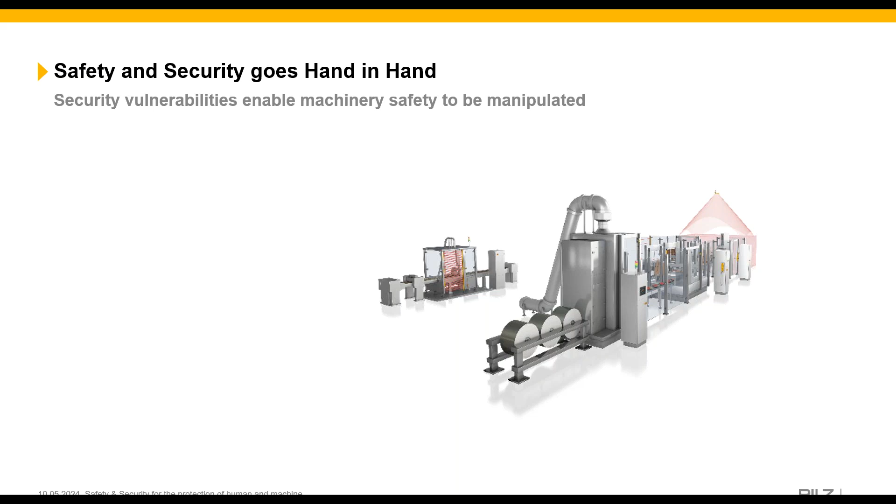So safety and security: security vulnerabilities enable machinery safety to be manipulated. We're all familiar with machinery safety, which protects your staff from hazards due to the machine itself. But security protects your machine and its data from manipulation from unauthorized access, so we're protecting against corruption.

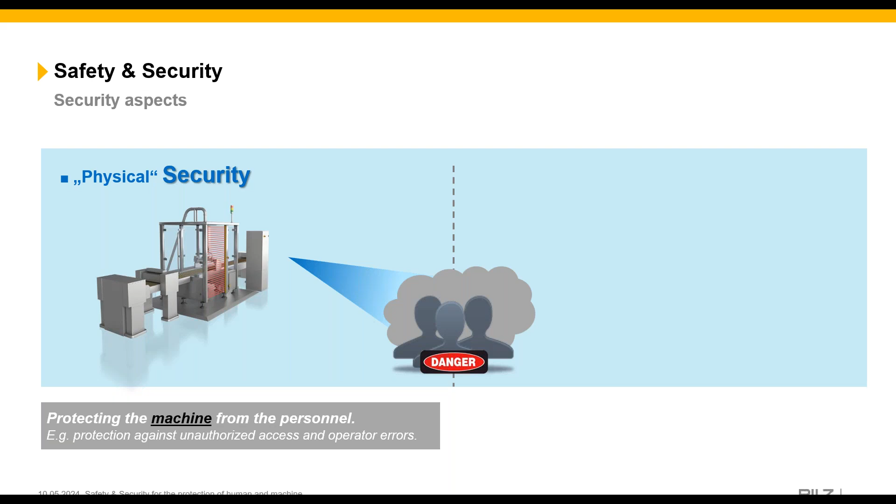With security aspects, we have physical security, which protects the machine from personnel, i.e. we're protected against unauthorized access, operator errors, etc., even to an HMI screen. And then we have information technology security, where we're protecting devices and data from attackers, and that could even be in-house, or it could be remote.

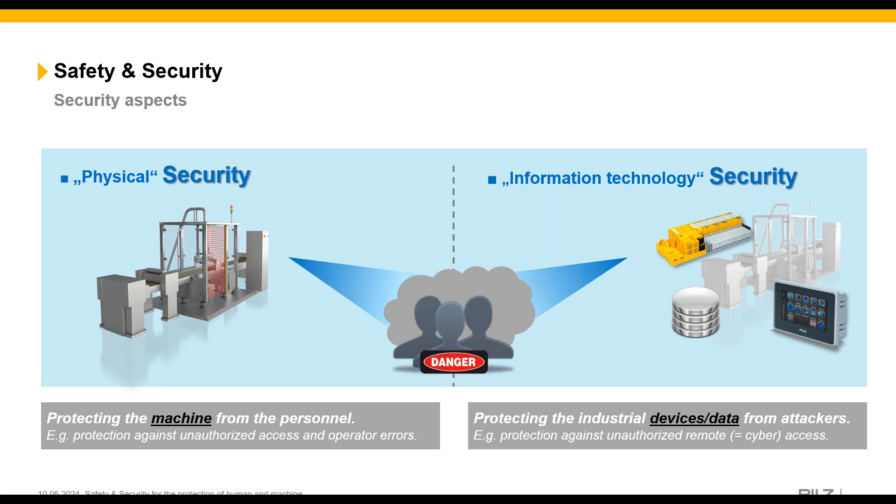So why is machinery safety in transformation? If we look at industry, from the early days of industry, from steam power, weaving looms, now we have the terminology of Industry 4.0, Internet of Things. So there's now an ever increasing need and desire to interconnect everything together, so we can see what's happening in real time throughout the world. And as a part of that, security has become an integral part of our everyday lives.

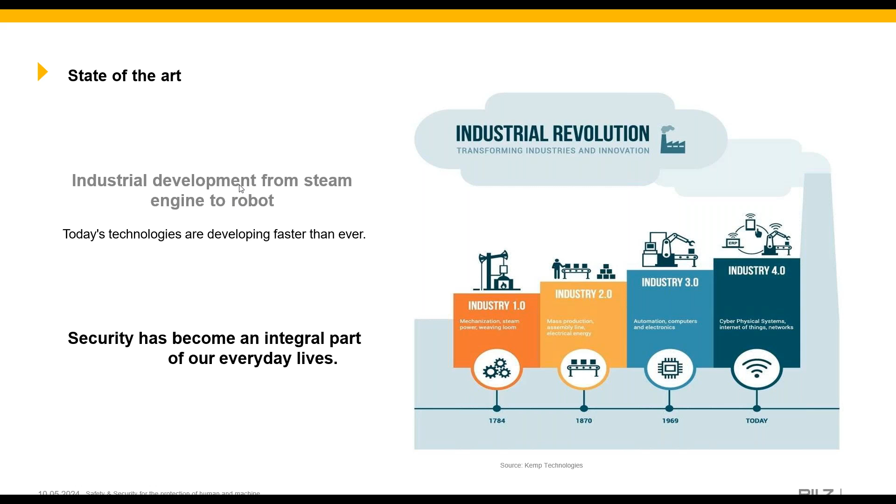If we look at how things stand currently, safety really is covered, or was covered, by the Machinery Directive, the Supply of Machinery Safety Regulations, and security has kind of been left to one side. It's not really been looked at. But because of this increase in digitalization and networking within the operational side of manufacturing, we need to now take this into account. So there will be changes upcoming, the machinery regulation being one of them, where it will now look at both safety and security.

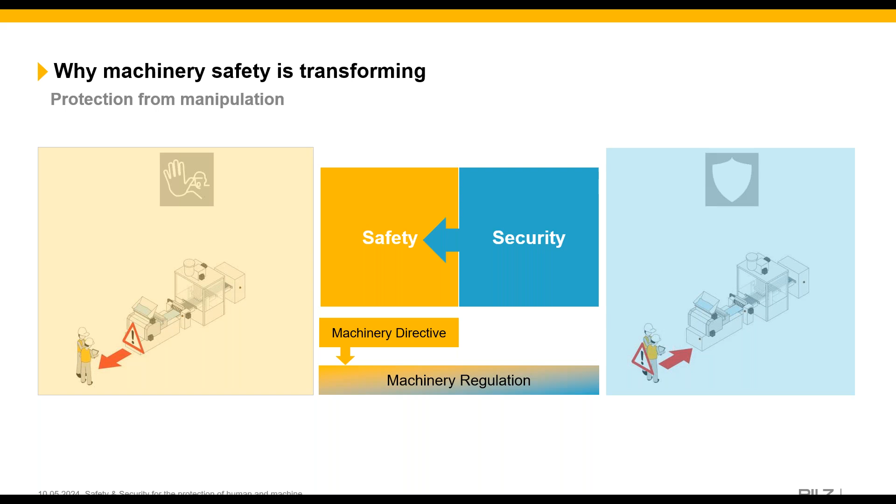So it's a changing process, really. We have the machinery regulation, and this has been published. We have the Network Information Systems, NIS2, which is also published and due to be implemented. And then we have the Cyber Resilience Act, again, has been published and is due to come into force.

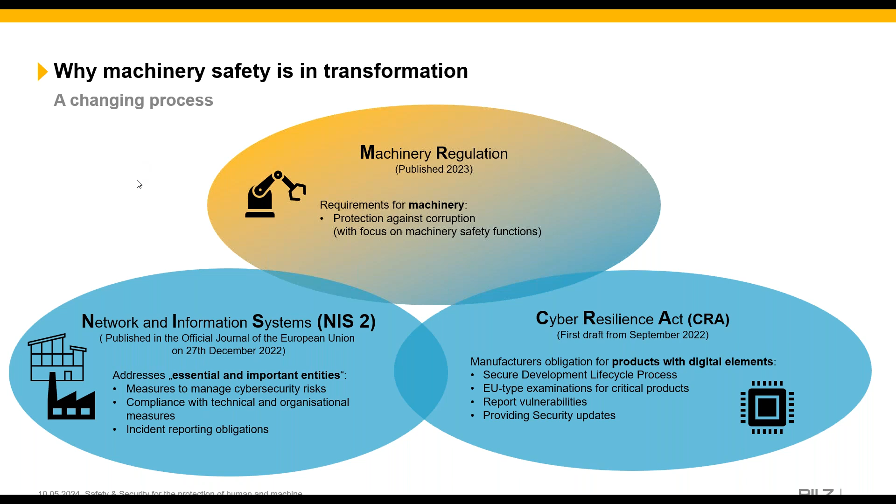So the NIS2 directive - we're unsure at this stage whether or not the UK government is going to take this and incorporate it into UK law with regards to Brexit. But we do have NIS, and this pretty much covers large utility companies. The NIS2 directive is looking at that, but also manufacturers of machinery and equipment.

We have the machinery regulations. This was published last year, and this will now look at protection against corruption, so cybersecurity, and cybersecurity will also most likely form a part of ISO 12100 for risk assessments. And then we have the Cyber Resilience Act, which is expected later this year, where if there's products with digital elements, they should be delivered without any known vulnerabilities.

So as it stands, if you're a manufacturer of electronic equipment with digital elements, you could actually sell those even if you know that there are vulnerabilities with regards to cybersecurity. From October 2024, if you know that there are vulnerabilities within those products, then you shouldn't be placing those on the market.

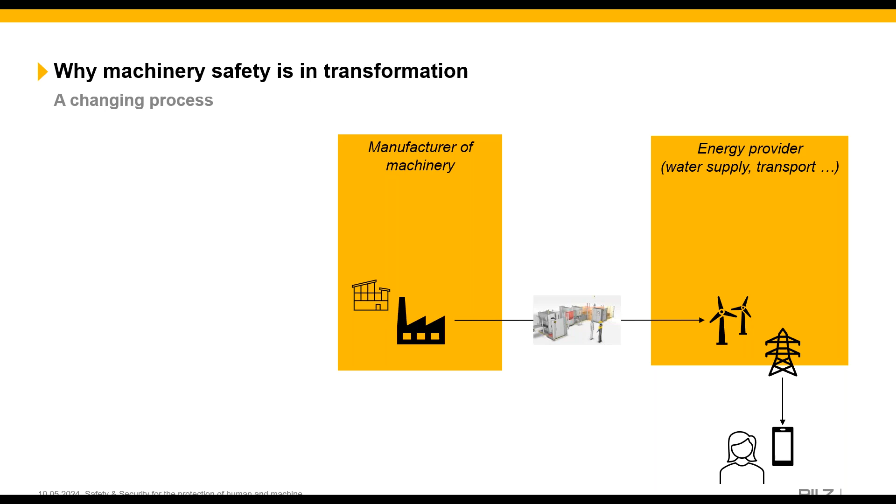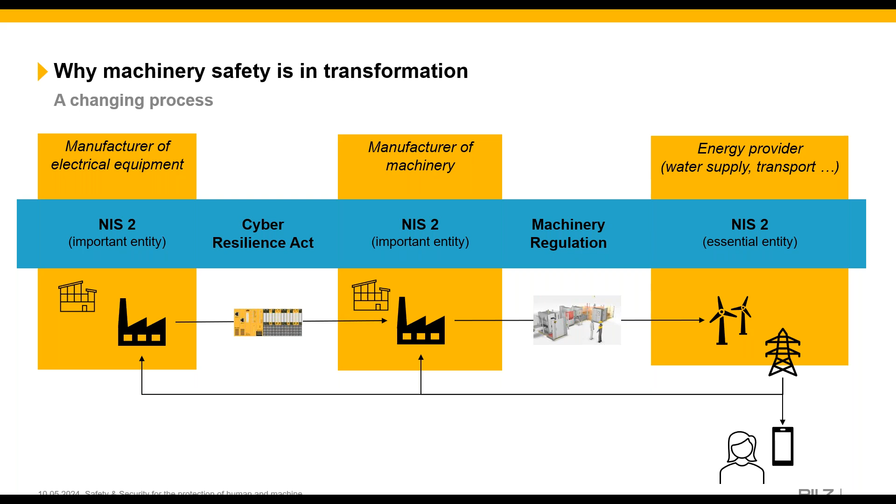So it's an ever-changing process, really. With the ever-increasing need for connectivity, we have our energy providers or utilities, our manufacturers of machinery, and our manufacturers of electrical equipment. NIS2 will become essential for utilities and large companies, and an important entity for manufacturers of machinery and electrical equipment. The machinery regulation will come into effect in 2027 for manufacturers of machinery, and the Cyber Resilience Act will come into force for manufacturers of electrical equipment. So you can see how they're all interlinked together.

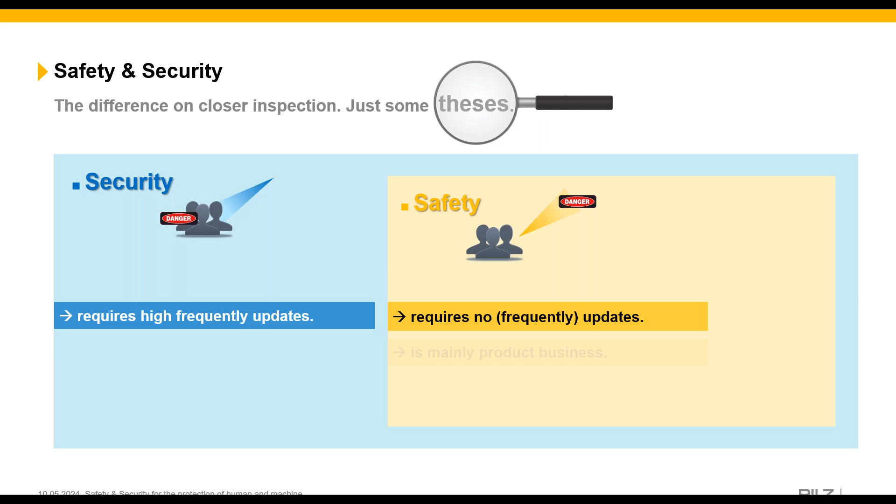Safety is mainly a product business, whereas for security it's solutions. Primary concerns generally are manufacturers with safety, and for security, machine end users.

So if we look at achieving our security objectives, what we class as CIA is our number one priority. That's confidentiality - data may only be read or modified by authorized users, and this applies for access to stored data as well as during data transmission. We then have integrity - this data may not unknowingly be modified, and all changes must be traceable. And then finally we have availability, and this is the prevention of system failures, so access to data must be guaranteed within an agreed timescale.

Our confidentiality, integrity, and availability priorities are really different between our IT and OT networks. For IT, confidentiality typically takes number one priority, followed by integrity and then availability. What we mean by that is our data, we want to keep that stored and secured - we don't want any GDPR breaches, for instance. With regards to availability, if a laptop was to fail or a printer fails in an office, generally there is a spare one or a way of working around it. So that's why priority is less.

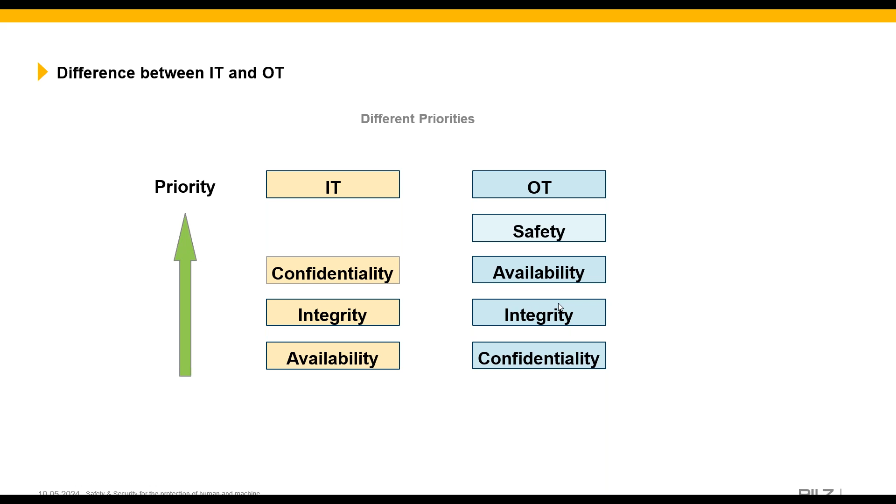So what happens is if there is a threat to our safety-related part of the control system - the relationship between threats, vulnerabilities, and consequences all have a direct risk, a security risk, on our safety system. These threats basically will expose any vulnerabilities that we have, and those vulnerabilities will then have a consequence on the performance of our safety functions. So what we need to do is introduce countermeasures to combat against those, and we'll run through that in more detail.

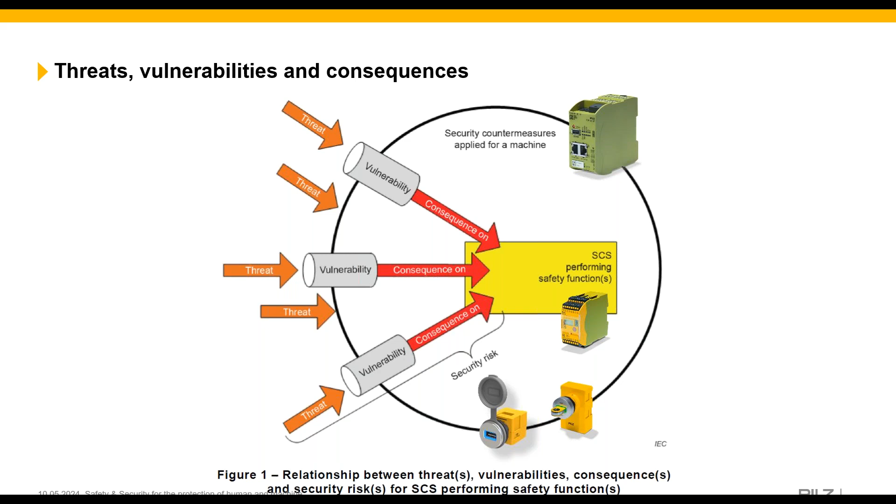If we look at security with regards to the machine control system, a threat can succeed, or if it's exploited, that will then create a vulnerability, and the consequence of that could be on an asset - that could either be components or human - and that could lead to a security risk to the safety control system. And it doesn't have to stop there; other consequences could be environmental impact, loss of property, business interruptions, etc. That security risk could have an impact or trigger the failure or malfunction of the safety functions no longer performing as intended, and that can then lead to degradation of risk reduction measures.

So, for instance, you might get unintended movement, or there might be an increased reaction time to a light curtain, for instance, and that would result in harm potentially.

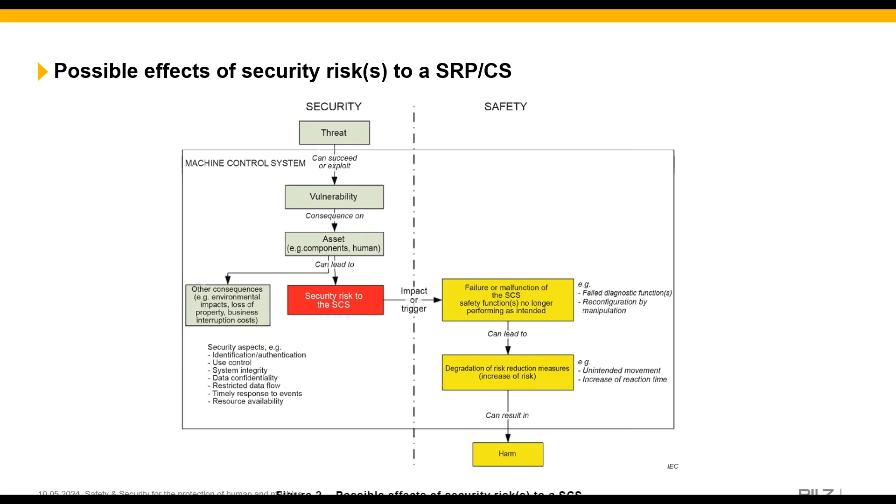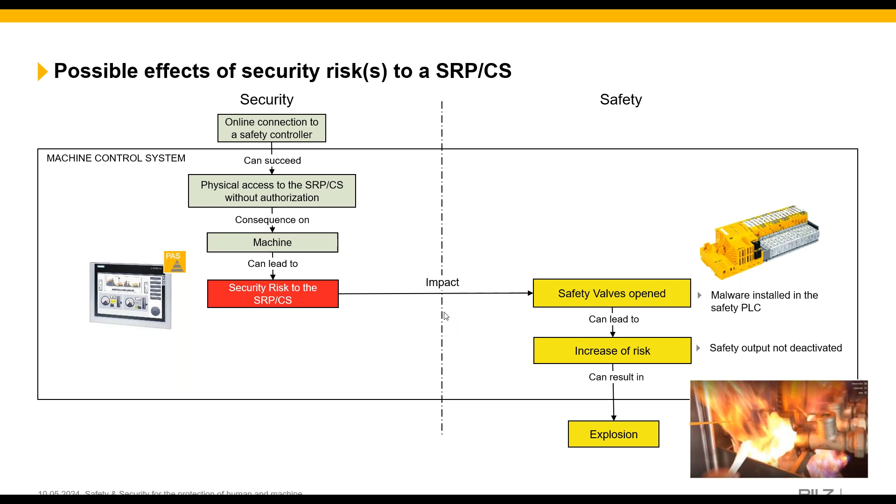So, therefore, an online connection to a safety controller, or physical access to the safety parts of the control system without any authorization, that's got a consequence on the machine. That leads to a security risk, and the impact of that is safety valves being opened due to malware installed on the PLC. That can lead to an increase of risk, so there's no safety output because that's not deactivated, and that could lead to an explosion. So it's just an example there.

So countermeasures to machinery and related cybersecurity and machinery related standards.

ISO 27000, this is information security management systems. This is really for organizational implementation. It looks at information security management systems, giving information on security, cybersecurity, privacy protection, so information on cybersecurity controls, how you can do implementation, so there's guidance on monitoring measures, analysis and evaluation, and it also gives information and code of practice for information security controls based on some cloud services.

We then have IEC 62443, which is security for industrial automation and control systems, and this runs through application and products, split into various parts. So there's general requirements, then policies and procedures for the organization. We have system requirements, and then broken down into components, which I'll go through in more detail.

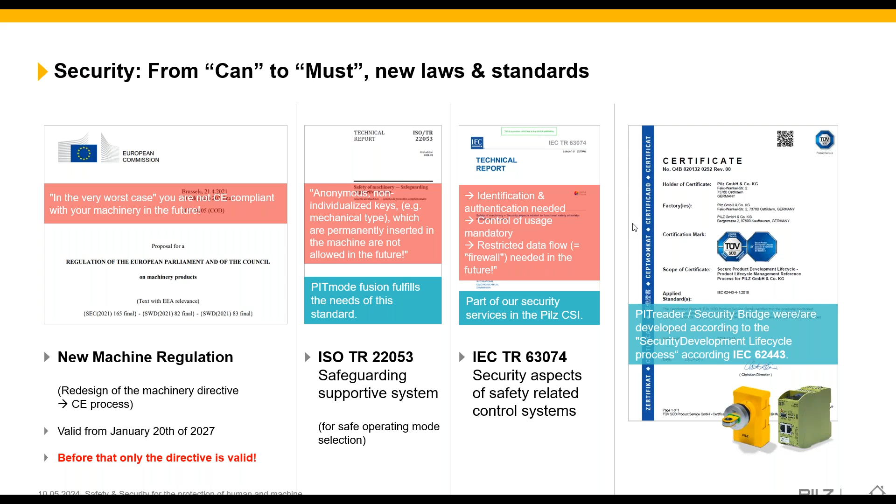So the machinery directive is becoming a regulation, and it's going to talk about protection against cyber threats, and this becomes an essential requirement. It will form part of the EHSRs, the essential health and safety requirements, and security for machinery safety becomes mandatory. So as mentioned, in the worst case, you'd no longer be CE compliant with your machine in the future.

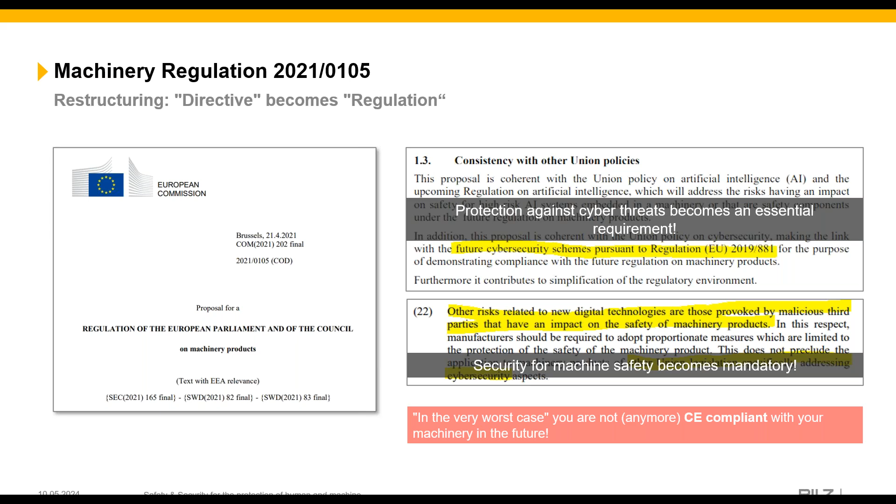So what does that mean? We have emerging digital technologies with regards to security. There's no direct reference to the NIS directive, but it still discusses aspects of cybersecurity within the regulation, and we look at protection against corruption. This would actually form a new EHSR 1.1.9, and this defines requirements for interference, really, so protection against corruption.

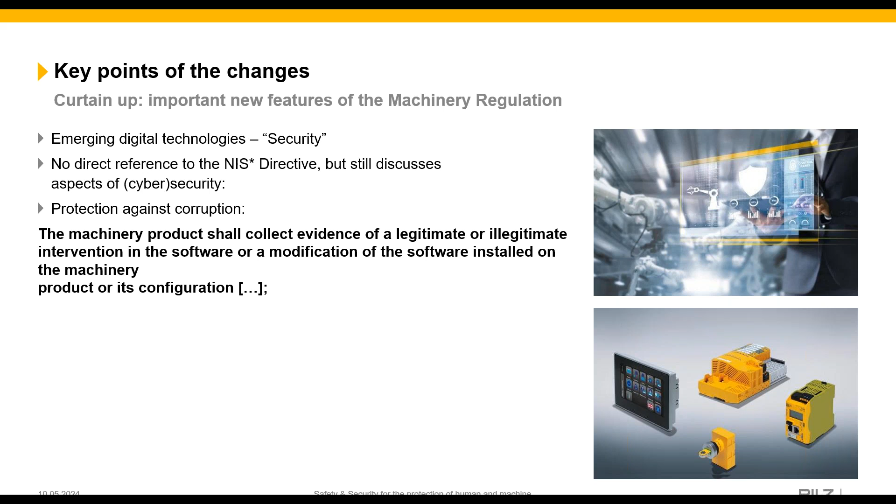The linking of devices, such as USBs, and remote devices, such as the internet, must not lead to dangerous situations. So the machinery product shall collect evidence of legitimate or illegitimate intervention in the software or a modification of the software installed on the machinery product or its configuration. So what we mean by that is it's not just somebody doing a malicious attack, it could actually be somebody making a mistake, an employee or a disgruntled employee in this case.

And then we've got the safety and reliability of our control system, and this is EHSR 1.2.1, and this will be a rewrite. The paragraph here is that it must be able to withstand malicious attempts from third parties, shall not lead to hazardous situations, shall be protected against accidental or intentional corruption.

So again, what we mean by that is this isn't necessarily just either a state sponsored attack or somebody in their bedroom trying to gain access intentionally to a control system. It could be a maintenance engineer, or it could be an employee that has just made a mistake. So it's both malicious and non-malicious.

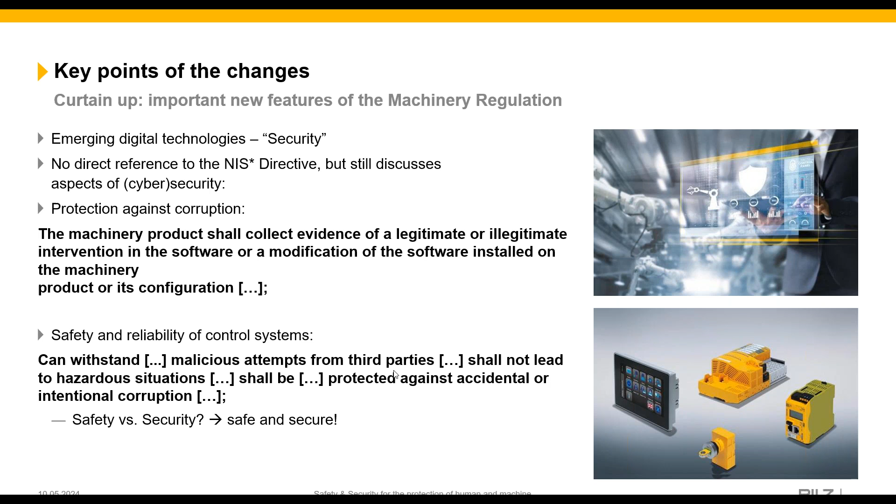So safety and security really is becoming safe and secure. If we look at safeguarding support systems, this is where typically you would have a mechanical key in a panel, and that key would be in machine run mode, and then you may have to run it to a jog mode, for instance. When we look at technical report 22053, we need to look at safeguarding support systems, and what these allow is identification of authorized personnel. There's verification that authorization for that selected task matches the identification of the person or personnel. It informs the user of that authorized task. It enables the mode of what's called safe mode operation to correspond to the selected task, so you can change from a run mode to a jog mode, for instance, and specifying the zones to which authorized personnel have access.

We'll run through this in more detail. Effectively, you've got your safeguarding support system. In this particular case, we've got our pit reader and our key. If our person comes along with their key, and they're trained, competent and authorized, they'd place their key in the reader, and that would allow them to change the mode of the machine, for instance, or gain access to the HMI. That would determine the permissions they have and authorize that, and that would send a signal to the safety related parts of the control system or HMI to allow them to make those changes.

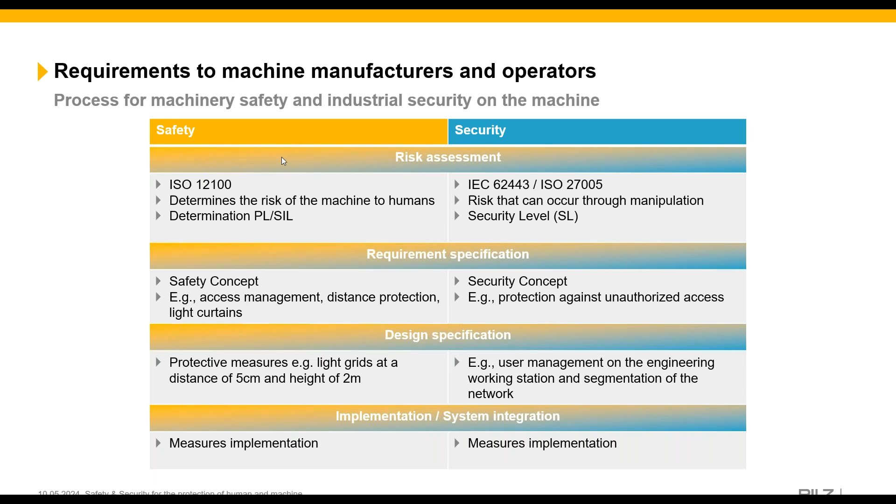And then finally, we'd have our implementation and our system integration, so it's pretty much the same for both - those measures would be implemented. We'd then have our verification and validation, so we'd do verification of the correct implementation of the risk reducing protection measures for our machinery, looking at SISTEMA, PAScal reports.

We'd then do our functional safety validation once it was installed. But for security verification, we do our verification of security measures, but validation is not required. With regards to the cycle, there might be annual safety briefings for the machine with regards to safety. But as mentioned earlier, with security, it's going to be far more frequent.

So we'd have to look at what vulnerabilities become known within the industry. We can look at websites such as CERT@VDE or ICS-CERT, and these are IT security platforms that share problems and issues specifically in the field of industrial automation.

We then have to risk assess those vulnerabilities. Device manufacturers would describe what vulnerabilities they may be or what they found. Machine manufacturers would evaluate these in the context of the machine and the risk assessment, and information would be provided to the machine operators. We then have our patch management.

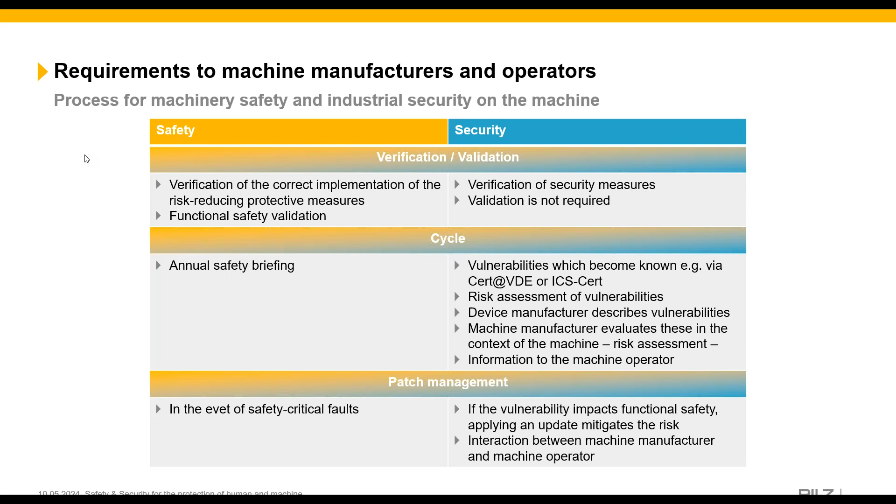For machinery safety, it's really in the event of safety critical faults that we would look to upgrade. Whereas with security, if the vulnerability impacts functional safety, we'd have to apply an update to mitigate that risk, and that's where we use those security platforms, those websites, to look at that. We then have the interaction between the machine manufacturer and the machine operator.

So you may be familiar with this graphic that we have, which we typically use at Pilz for machinery lifecycle. So we have our risk assessment, our safety concept, safety design, safety implementation, safety validation, and we then have our machinery compliance, for instance, with CE marking, etc.

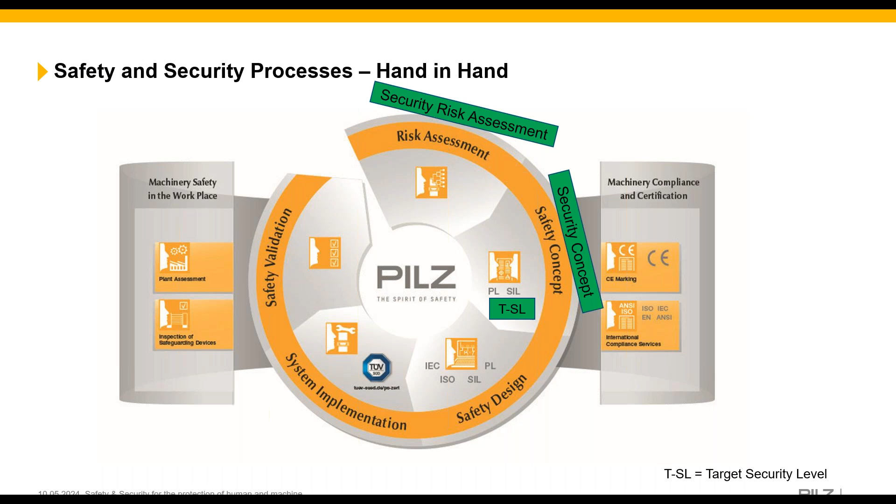If we look at this for security, so we'd carry out our security risk assessment, we'd introduce our security concepts, and this is where we'd have a target security level that we'd want to achieve. We would look at safety design. We'd then use 62443 and 63074. We'd use those standards to assist with that. We'd then do our security design.

We would do our security verification. We'd carry out some kind of tests. But then this is an ongoing process. So with machinery safety, it typically stops here. But with cybersecurity, it will be an ongoing process throughout the life of the machine.

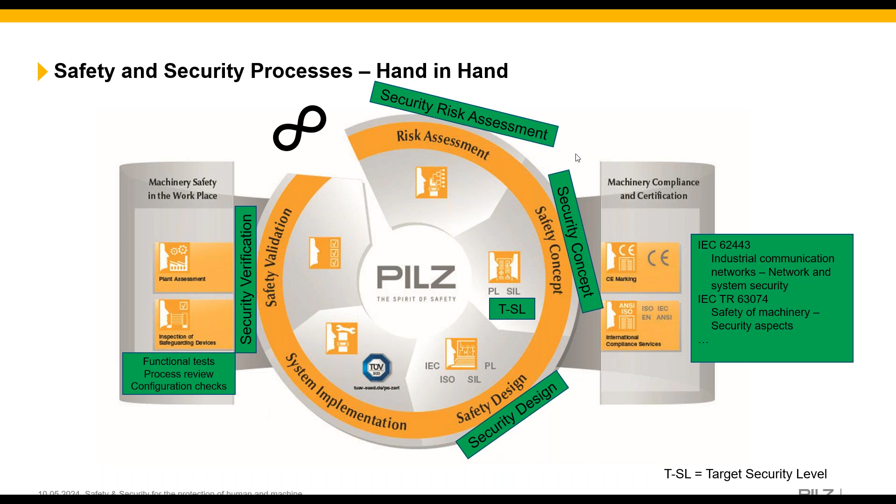So risk assessments with regards to zones and conduits. So we have our organizational security measures. So these would be kind of taken from 27000. So if we use the analogy of like an airport, so you have security checkpoint rules.

So, when you've booked your flight, you're going to get information sent through from the airport or the airline to say what you can and can't take onto the plane, for instance, or take into the airport. So these are operational measures. You probably get and you hear public announcements, don't leave your luggage unattended, for instance. And again, that is all part of their policy, really, and procedures for awareness to passengers.

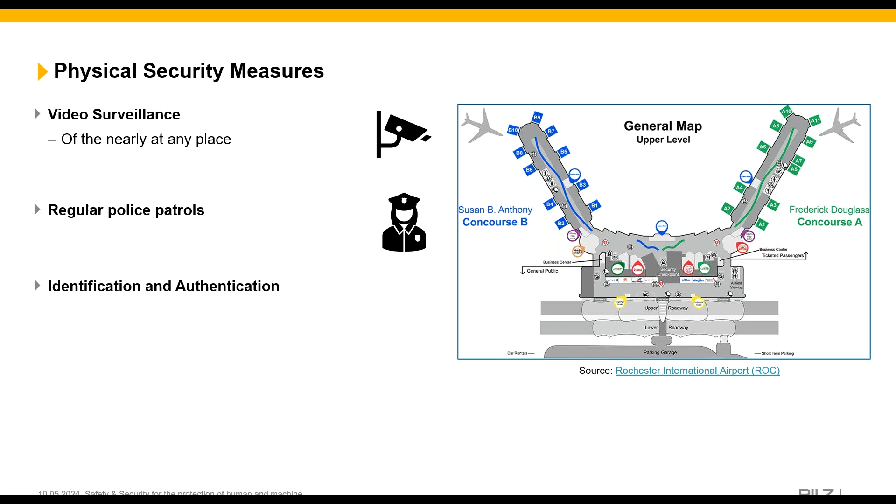There'll then be physical security measures. So there could be video surveillance, regular police patrols, but then there is identification and authentication. And what we mean by that is, anybody can go to the departure lounge, but only if you've got a ticket can you actually go through.

So, to get that, you would go to the ticket counter. Are you the correct person for that flight? You would typically show your passport, for instance. They would identify you and authenticate that you are that person before they issue it. Border control, who am I? Am I allowed to leave or enter?

So that's kind of a zone because you're going from one area to another. Boarding the gate, am I allowed to board the plane? Again, you'd have your passport and your ticket checked. So at each point, you're being identified and authenticated against. And if you are that person, then you'd be allowed to go through if you're allowed to. So again, for airport staff with their key cards, are they allowed to access restricted areas?

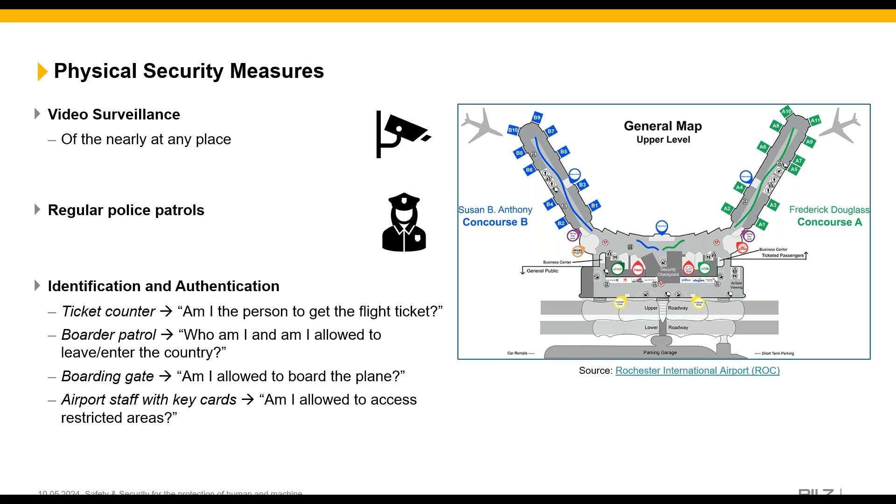And so if we look at this with regards to the airport, the green zone is our departure lounge. So that's for all members of the public, really. And the red area is your ticketed passenger zone. So that's once you've gone through security. So in addition, each gate within the walkway to the airplane is a zone, and we've kind of highlighted that in blue and in green.

So in order to move between these zones, the green and the red area, there's specific rules and they're defined. And so to move from the general public zone to the ticketed area, so the passenger zone, you need to pass the security checkpoint, which is this yellow circle. And you can only do that with a valid ticket, as well as passing the screening of bags, etc. So that's kind of like our VPN and our firewall. There's our rules, etc. that are there. And if you don't meet those rules, then you can't go through.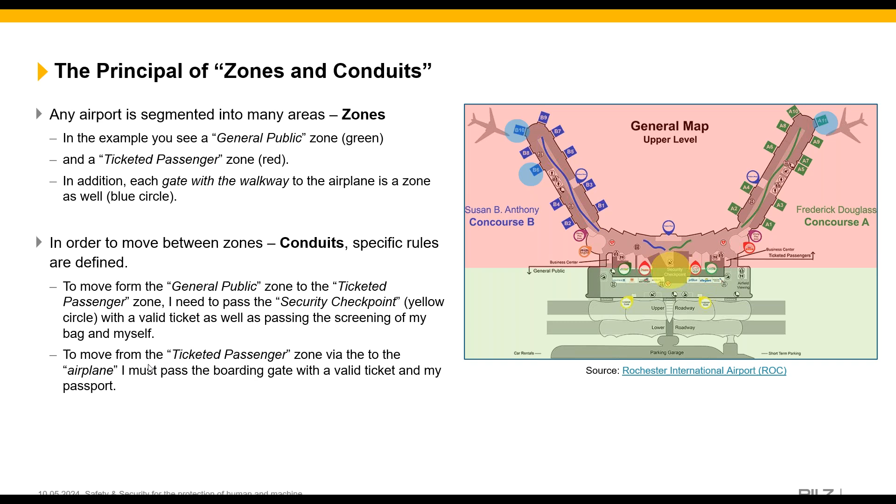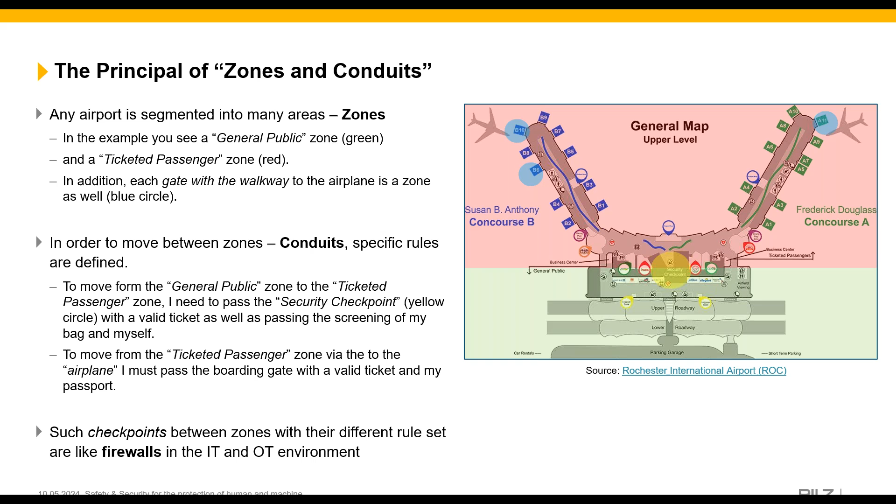And there you can only do that if you've got the correct ticket, passport, identification, authentication, etc. So as I said, these checkpoints really are kind of like the different rules set between firewalls in the OT and the IT networks.

And so then if we look at our system under consideration, so using 62443, we have our IT and we've got our OT networks, so we can zone those off effectively. So this is our IT network, this is our OT network. And then what we're going to do within that is we're going to focus on the OT network, and we're going to start to zone everything together.

So we would look at all of our safety systems, we'd look at all our process, we'd look at our Wi-Fi hotspots, we might look at all our standard PCs, SQL servers, etc., etc. So we'd look at everything that's within that OT network, and we would look to group them, to zone them together.

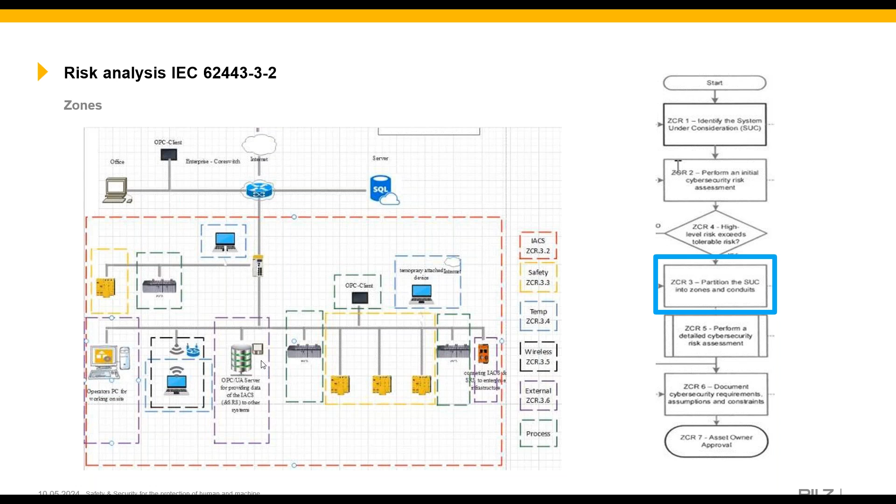Then from that, we would then look at really the conduits between them. What's the communication between them? What's the influence of one to the other? So, we'd look at maybe maintenance, for instance. What do maintenance need to do? And what devices or zones do they need to have interaction with? And so we'd look at kind of the automation, safety, wireless devices, and all of these really have a flow between them, and we need to then create the rules, etc., between those, depending on the risk assessment and what is the risk to the OT network if it was compromised.

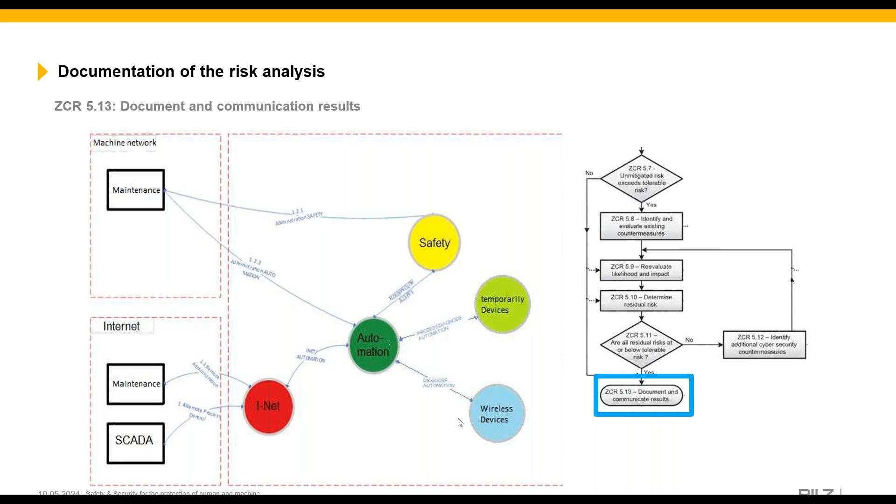And to do that, we would look at foundational requirements and countermeasures. So this part really is like our risk assessment to a machine. If we looked at a machine, we need to put a guard on there, we need to put an interlock on there, for instance. The interlock, the guard, the light curtain, they're really countermeasures that are being used to protect the machine.

This is similar, but for security, cybersecurity. So our foundational requirements are broken down into 7: identification and authentication of control, use control, system integrity, data confidentiality, restricted data flow, timely response to events, and resource availability. Based on our zones and our conduits, we will use either 1, 2, 3, or all of these to combat against those risks, and that would all depend really on what our risk assessment came back with.

So this is just a breakdown really of those foundational requirements. And really the industrial control system, what we mean with user management is access to authorization systems, certification, authentication with VPNs, etc., malware protection, application input validation. It's just broken down a bit more.

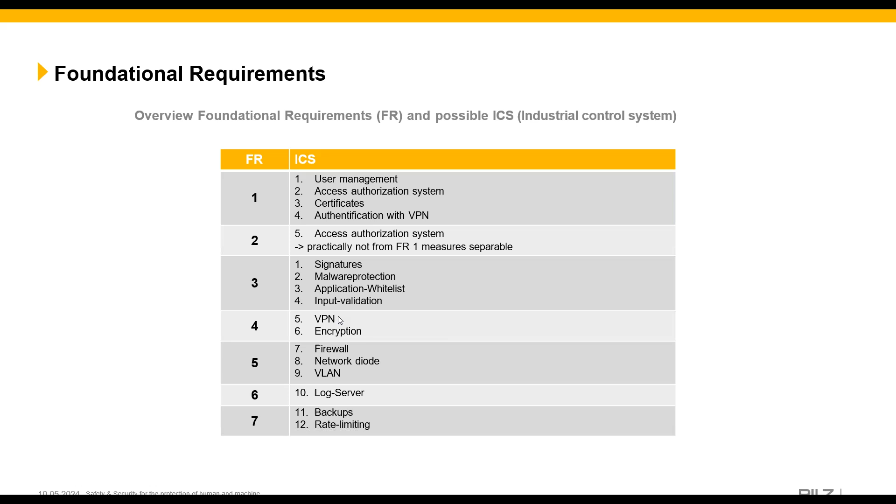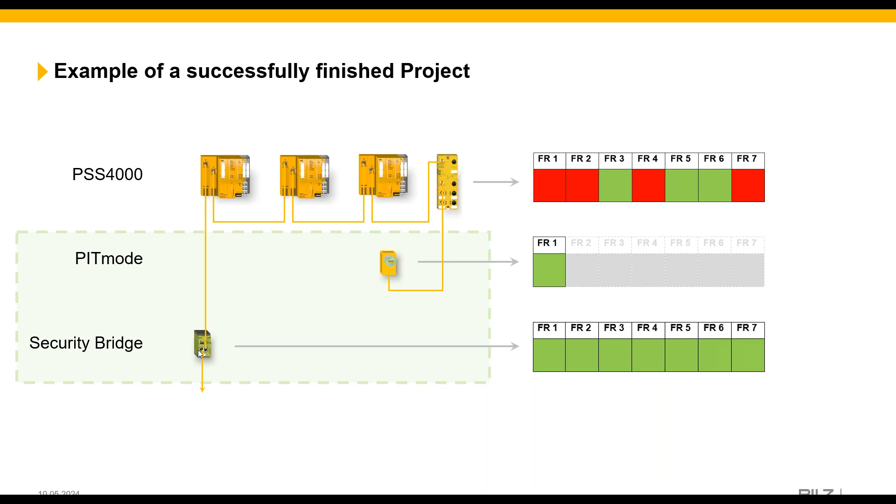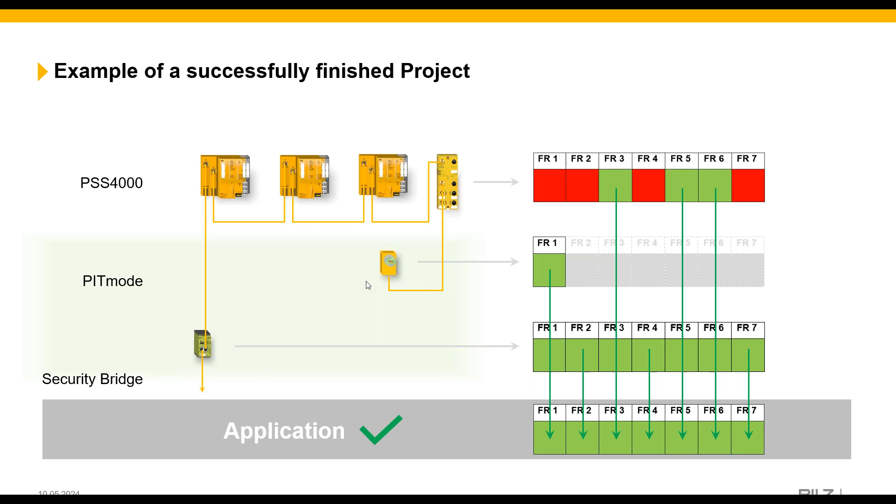So if we look at an example, really, we've got a PSS 4000. As it stands, the foundational requirements there of what it can achieve on its own, but by implementing what we call our PITmode and our security bridge, which acts as a VPN and a firewall, we can actually achieve all of the foundational requirements if they're required based on our risk assessment, and therefore we would meet the requirements of the application for the security level.

So our countermeasures. I'm really going to run through some products now that can help with this. So with identification and access management - what is identification and access management systems?

Well, really we want to protect the business. So we want employee protection, liability, productivity, and data. We want to make sure our employees are safe. We want to make sure that people just can't turn a machine on and off, even though if it was safe to do so, but we don't want them to do that if it's not right from a productivity point of view. So you want to ensure that only trained, authorized, and competent people can do that. We want to maintain our data and any liability, and we'll have a number of persons within the organization that are responsible for those things.

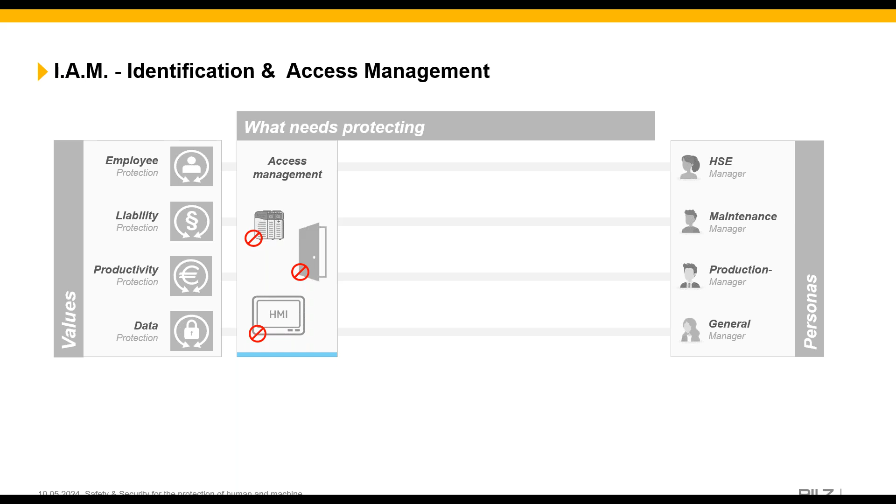And then we need to look at what needs protecting. So we've got access management - this could be to control systems themselves, HMIs, to areas of the machine. Safe operating mode selection, so we want to ensure that only the correct personnel can change a machine from running to a jog mode, for instance, or service mode. We want to have maintenance safeguarding, so we want to protect from unauthorized startup, for instance. So we can look at 14118.

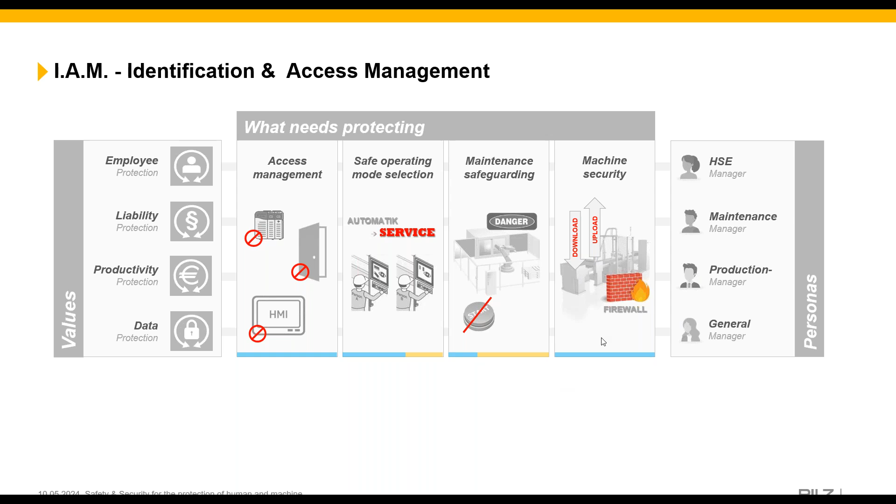And then we want to ensure machine security as well with our VPNs and firewalls. So we have a number of products now that I can run through that will protect against those and act as countermeasures.

So parts of identification access management - we have a number of ways of doing this. We typically have our key, we have a card, or you can have stickers, or potentially we can use your own card readers, depending on the frequency of those. So that is used to identify as an identification, and on there, really, it would store all the permissions that personnel has - so what's their training, etc.

We can set a timestamp on there so that, if they need to be retrained every 12 months, then we can set a date so that has to happen. It's not going to be kept on a spreadsheet somewhere. So if they come after 12 months and a day, it would prevent access. And then we have the access side, which is really the forwarding of the information, so the authentication of that identification. We do that through different readers and PITgateboxes.

So the identification will be, who am I really? The person, who are they? What hardware can they have basically permissions to, processes, etc., and that could be different for each machine. So depending on your requirements, if I'm familiar with one machine, I might have all admin rights. If I'm not with another one, then you can restrict what I can do to that. So again, it's all based on your qualifications - are they an operator, service, inspector, line manager, for instance? What level's their education? Are they a beginner, expert? Are they a supervisor?

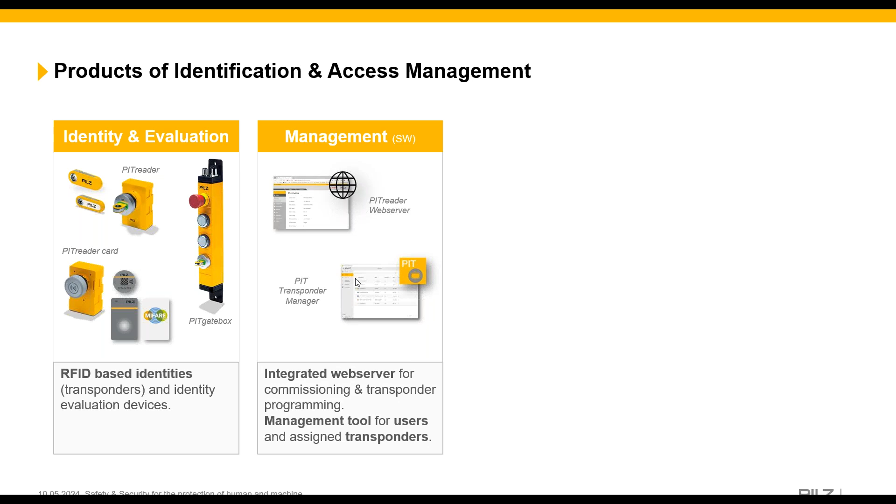So it's all based on what we call RFID, near field communication. That's the way the technology operates. We have an integrated web server, and that's what you can use to program the keys and the permissions.

The PITreader devices can also be networked. So depending on your application, it can either be standalone at the machine, or you can network them together, and you could do it via the supervisor's desk.

And then we can also look at operational elements as well. So we can actually control things like the USB switch or an Ethernet switch. So if you had a contractor come to your site, they can't just connect their laptop to your machine, because that Ethernet port would be down, or the USB port would be down, unless you were trained, competent, and authorized. Then you could enable that Ethernet connection or the USB port. So you can restrict that access.

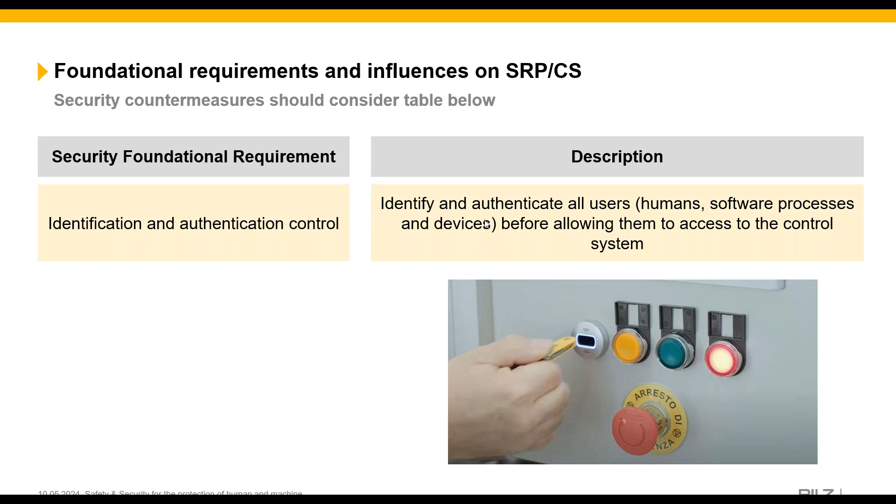So if we look at security countermeasures, with regards to identification and authentication control, we need to identify and authenticate all users before allowing them access to the control system. So what we mean by that is we'd insert our key into the reader. That may allow us access to the HMI. So it would be tailored to the individual.

So it's password replacement. We know passwords don't work because they're generally written down, or it's the first thing people ask for. They're written on post-it notes, etc. And it would allow you different control to be able to edit, read permissions on that HMI. What pages can you display?

Switching user languages. So we have heard of instances where new equipment has arrived. Somebody who's trained has changed something on the HMI. There's been an issue a couple of days later. Somebody saw what was done. They go into the HMI and cause a problem, and then it takes a few hours to reset the machine. This would prevent that because only trained and authorized personnel would be able to gain access to that HMI screen.

That's also the same for the controller or the PLC. So you can control who can activate functions, toggle between different kind of variants, programs, setting recipes, and then activating the USB Ethernet ports.

Then you've got door permissions. So this is really access permissions and management for industrial doors and gates. So only authorized personnel have access. You may be familiar with trapped key systems, for instance, where a trapped key system will work safely and in a predetermined sequence, but anybody can use that system. With this, the key is with the person, it's not on the machine. So only if you are trained, competent, and authorized could you actually gain access to that machine.

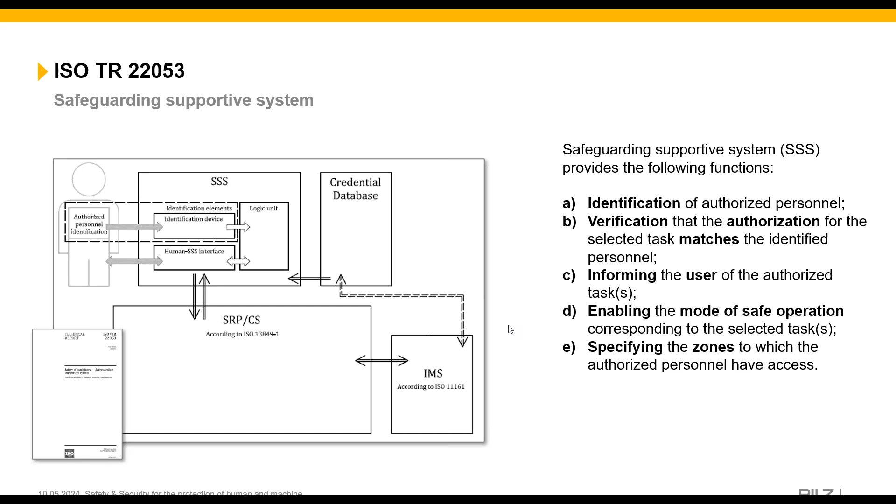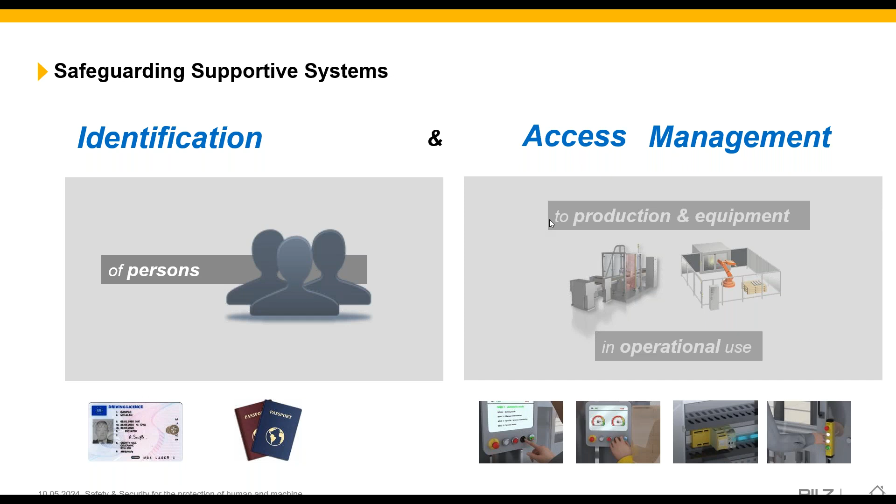So we ran through safeguarding supportive systems, but if I run through that now in a bit more detail, we have identification of the personnel. So that's our kind of driving license or a passport. So there's our identification. In this case, it's our key, and then that allows the access management, and that's where we've got our different access to either the HMI or safety controllers access, for instance.

So if we look at a typical installation, here's our control panel, HMI, got a USB reader, Ethernet ports at the bottom here. There's no identification. The key's always inserted in the panel and can just be turned by anybody, so you've got no idea who's doing what and when. The USB is also directly connected along with the Ethernet port, so anybody could connect to it, charge their phone to it. We've heard stories where people charge their phones, blowing ports. So that's how it stands.

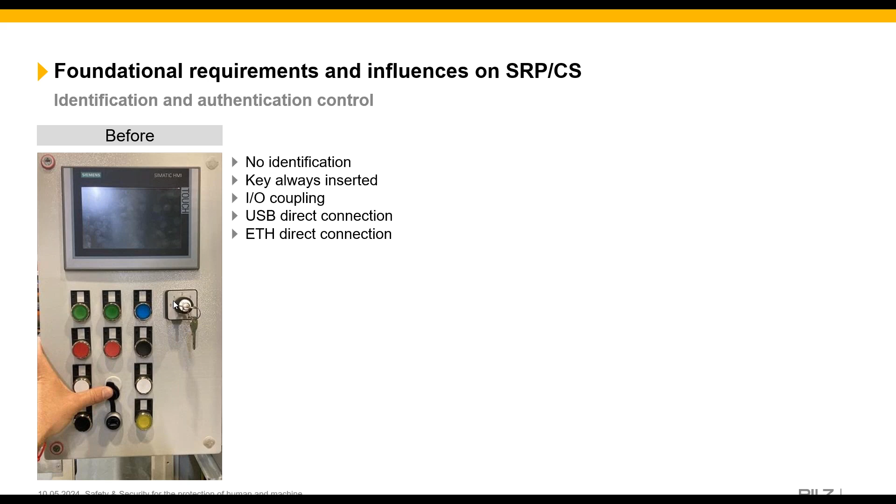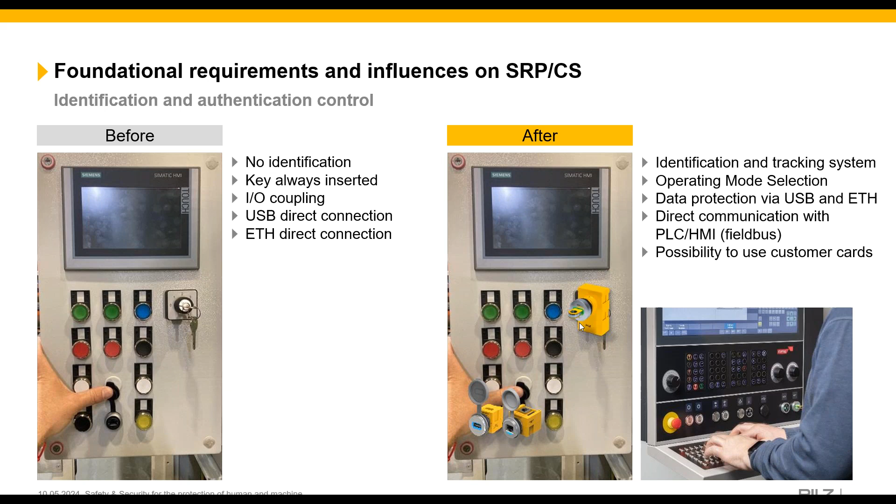Using encoded transponder keys with RFID technology, each employee can be granted machine approvals and permissions adapted to their abilities. This is where we can look at functionally safe operating modes, regulation of access and authorization, avoiding incorrect operation so the machine isn't down when it shouldn't be, and avoiding manipulation as well. This would effectively tick your

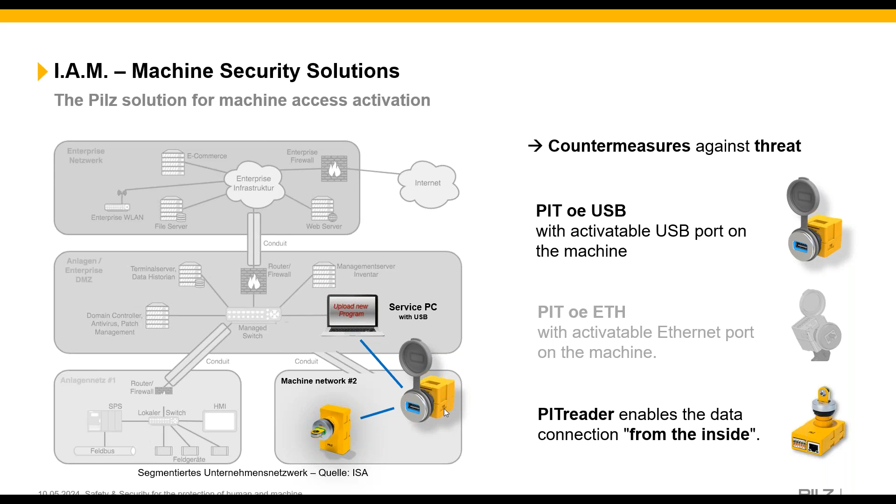So we've got our security measure here against the threat, which is a USB reader. Just to show you, if you needed to connect to that reader for service, for instance, you'd come along with your key. If you're trained, authorized, and competent, that would allow that PIT reader to be enabled, and you would allow connection basically. An example again here is malicious access to USB ports, so we're replacing that with our USB and Ethernet systems and our key to enable the enabling.

We've then got usage control, and this enforces the assigned privileges for authenticated users to perform the requested actions on the control system and monitor these privileges.

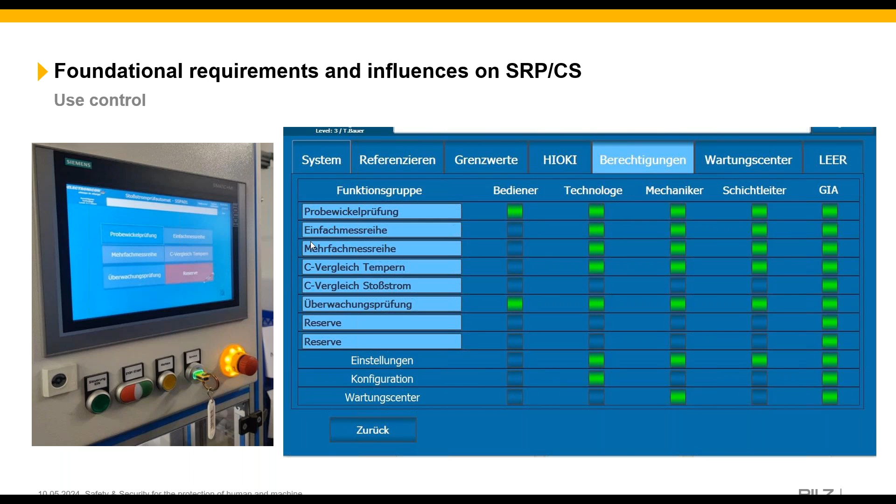So if I was an apprentice, for instance, and I see one of my colleagues doing something on the machine on a breakdown, if they're not there the next day and the same thing happens, I can't do what they've done because I haven't got the permissions. So really you're preventing potential downtimes to the machine and threats to the safety related parts of the control system through the HMI.

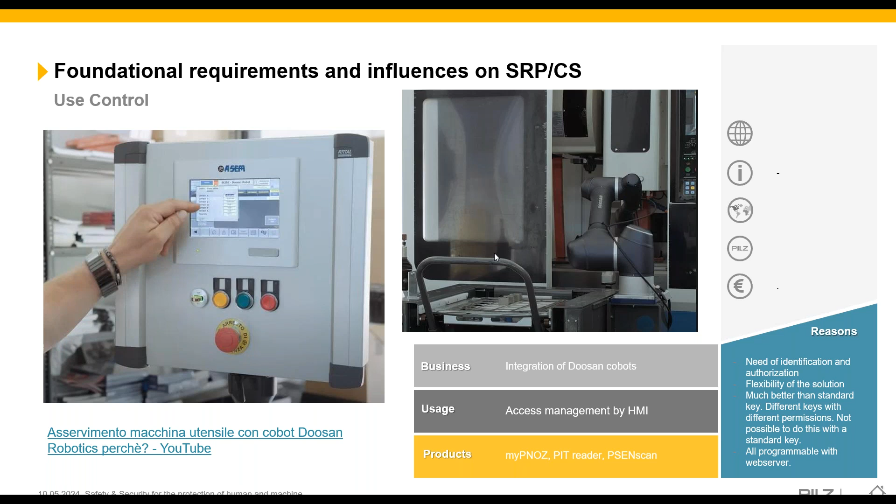So again, the application here is, here's our HMI. We have to put our key in. If we've got the correct permissions on the key, then it would allow for the HMI to be accessed.

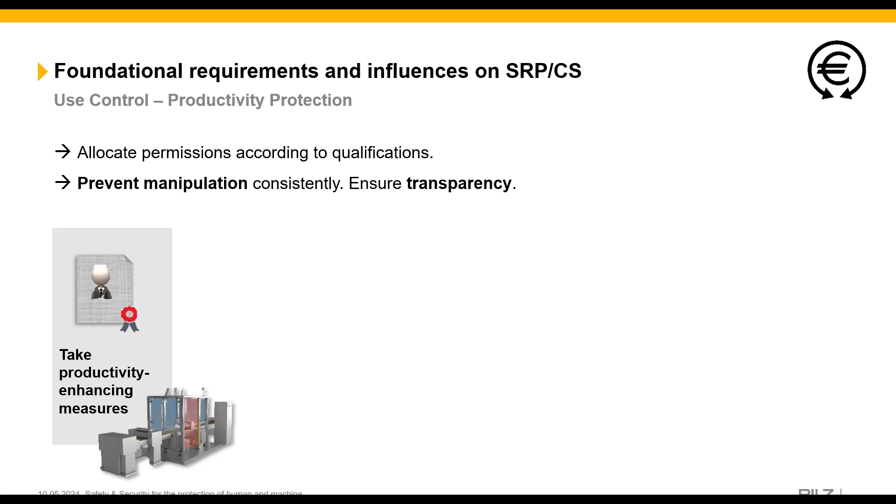So then we need to look at foundational requirements and influences on these safety related parts of the control system. From that, we need to look at preventing manipulation, really, so we have the permissions. That's an increase in quality due to clear responsibilities. You have effective know-how and protection of access to sensitive data, and you've got clear user levels, especially on complex machines.

Then the transparency really is the individualization of users, meaning that they are identified. Passwords are not secure, not personalized, and often known. Actions can be clearly assigned to users, and there's full detection capabilities in the event of a breakdown or an accident.

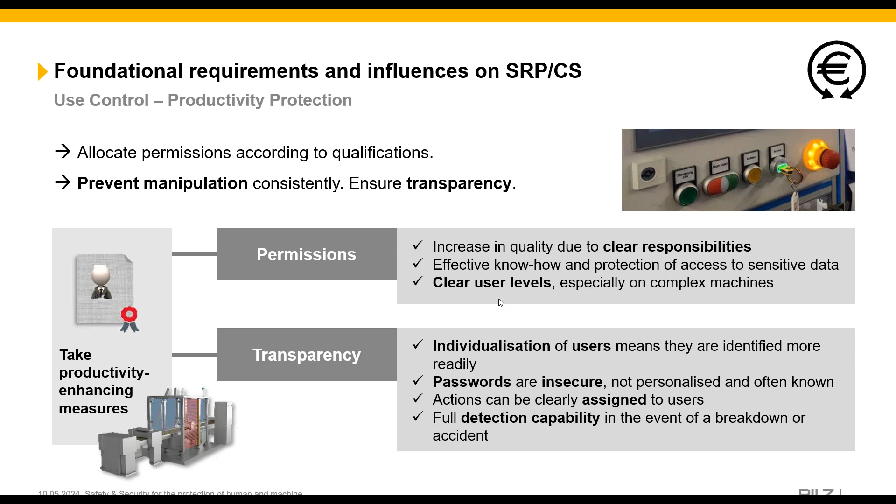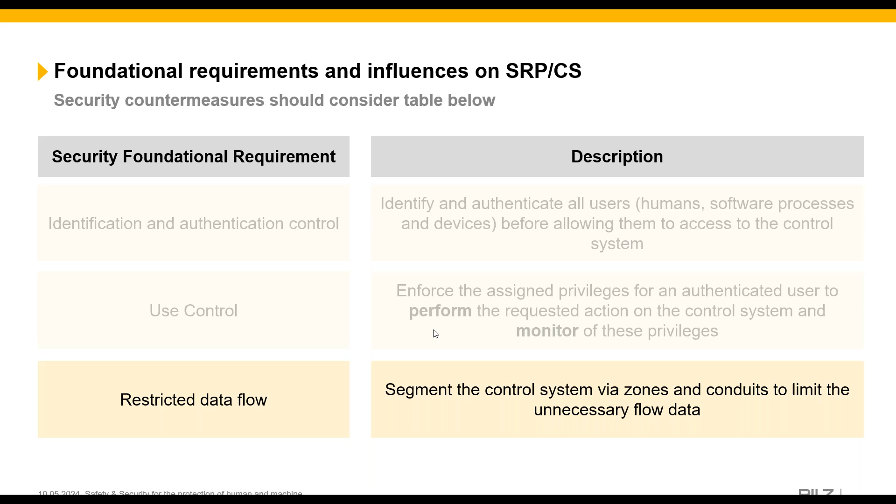So then we have our restricted data flow. This is segmented to the control system via the zones and the conduits to limit the unnecessary flow of data. In this application, we've got a PC that could be in Spain, for instance. We've got our machine in the UK, and we want to remotely gain access to that machine. So we have our security bridge, which acts as our VPN and our firewall.

Even if the person wanting to connect in Spain has got all the correct permissions for that VPN and the firewall, they can't actually gain access until somebody within the factory authenticates who they are, and then they would put their key into the reader and allow the final permission to allow that data flow.

So that meets the foundational requirements of 2 for use control, 3 for our system integrity, and then 4 for our data confidentiality.

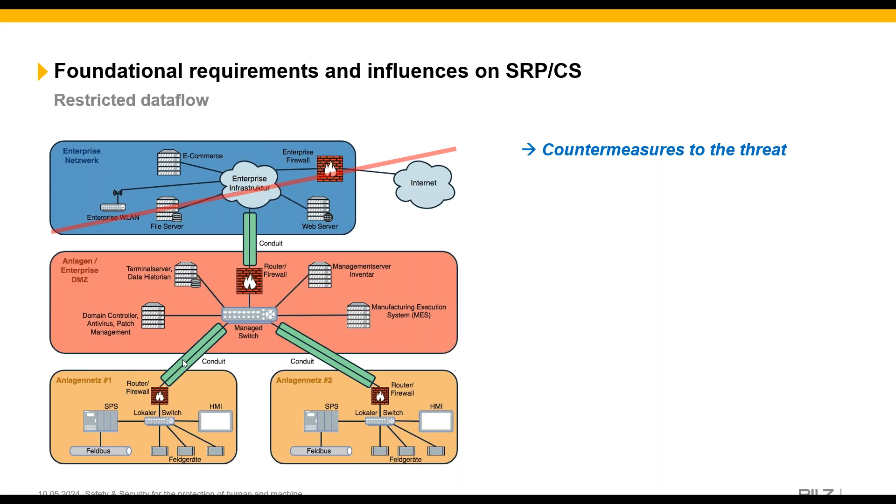So here's an example: we've got our PC and our PLC, we've got our security bridge with our firewall with the rules, so we create our secured encrypted VPN tunnel, and the PITreader enables the data connection effectively from inside. So without that, even if you've got all the correct permissions, you wouldn't be able to gain access.

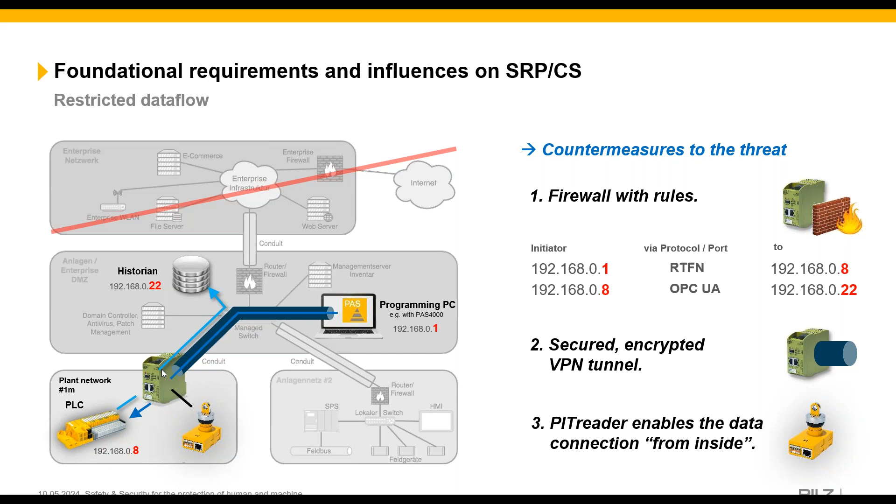We have safe operating mode. When the operating modes of machines are switched, i.e. from automatic to a service mode, the safety level can change because the protective measures that are used can be overridden or switched off. So the machine end user must ensure that only qualified and trained personnel can work in such operating modes.

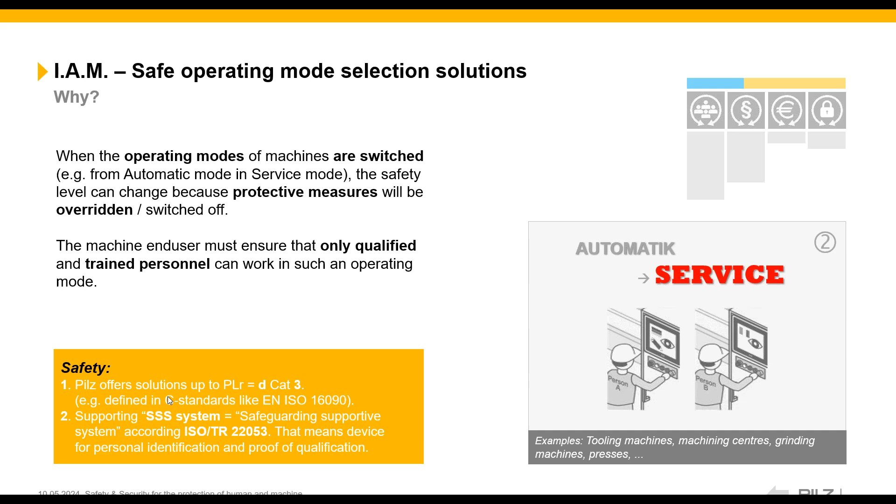In this case, we have our security, so we have our access via the RFID key, and then we have our safety via either a safe evaluation unit, which could be used with anybody's third-party functional safe controller, or within our own controllers via program blocks. Once you insert your key, based on your permissions, your level of competency, and your rights, it would allow you to change the mode of the machine. What these two devices are actually doing is evaluating that and then sending an output to change the mode of the machine.

And so there is 16090, which is for machine tools, where it talks about modes of safe operation and whether it's mandatory for using this type of system for changing between automatic and setting mode.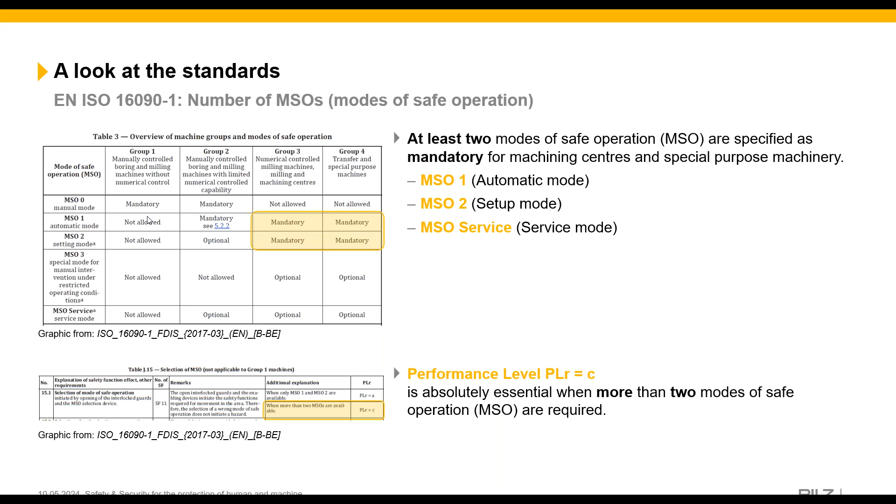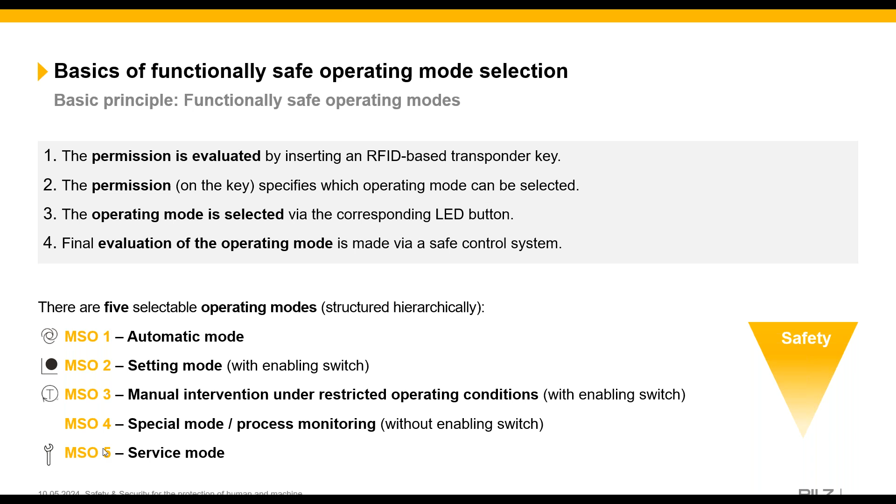We also do this kind of thing for machine tool centers. So if you've got an area within your factory with lathes, milling machines, etc., and you only want trained and authorized people to operate those, then you can do that with the PIT reader and a key.

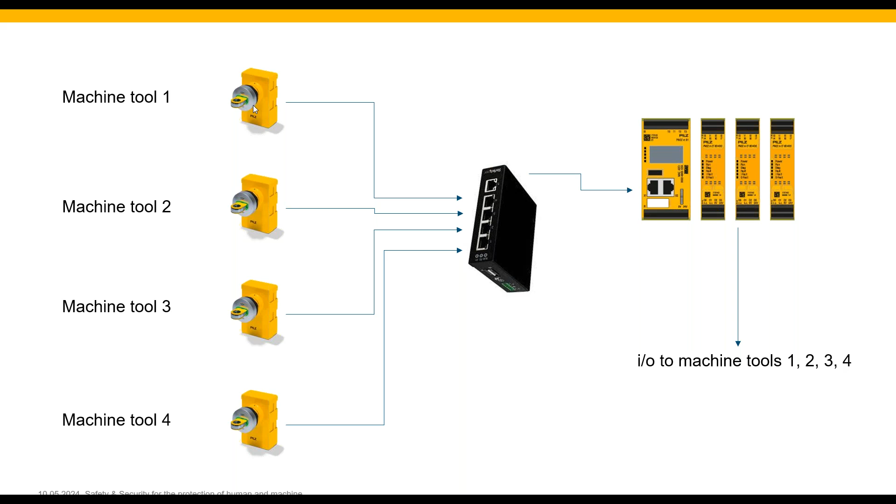Go through a network switch to a controller, and depending on your permissions would depend whether or not, if you went to machine tool number 1, whether or not you could actually switch it on and activate it. If the key wasn't in place, you couldn't, and if you weren't trained to do so and you put your key in, it also wouldn't allow you to do that.

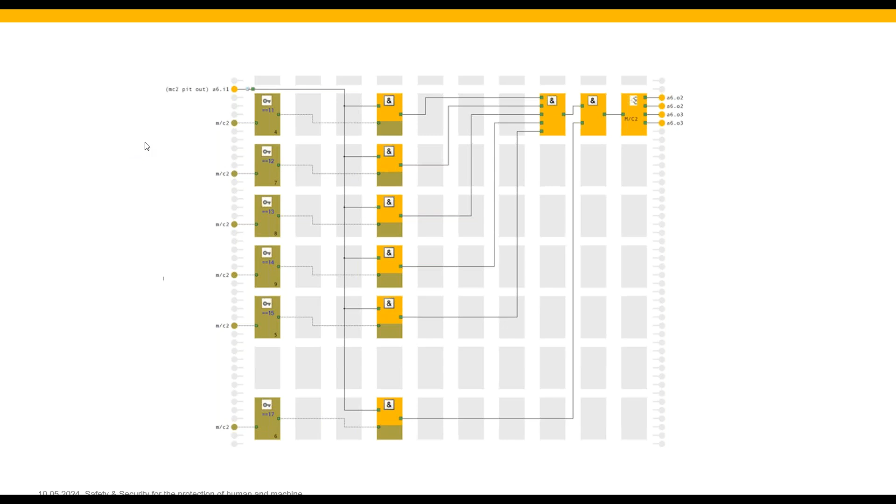And there's just a simple program here, really, albeit there's an error because these should be OR gates, not AND gates. So key 11, 12, 13, 14, 15, or 17 would effectively allow you to operate machine number 2. But if it was machine number 3, you could just take out key number 12, for instance, and it wouldn't allow that.

This can also be used really to assist on 14119 and prevention for motivation to defeat. That can be avoided by implementing alternative operating modes. And if we introduce modes of operation, this can make defeating the interlocking device unnecessary or unattractive. So by introducing permission keys, such as our PIT gatebox, with the PIT reader, we can restrict operating conditions to authorized and trained personnel only.

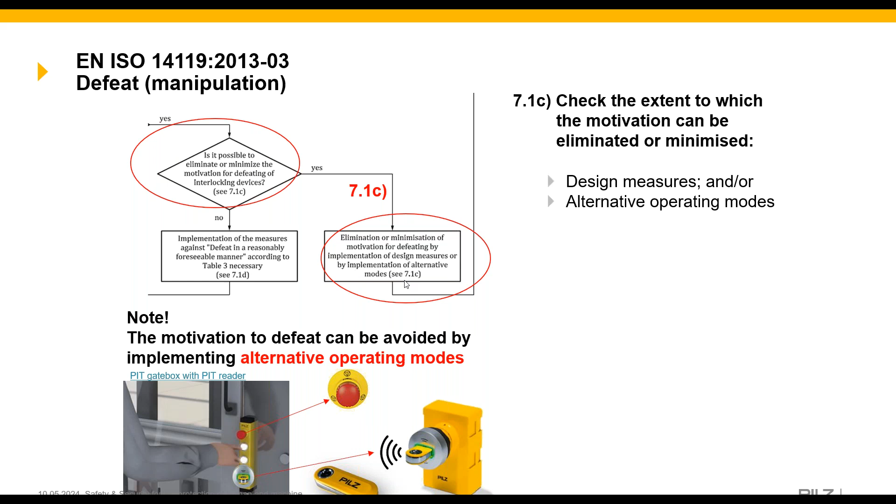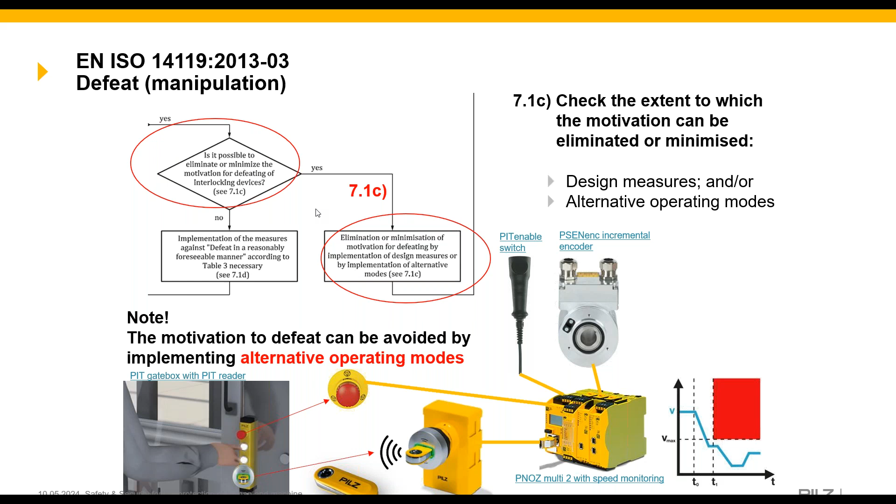So only those trained and authorized persons can operate the interlock and stop the machine. But you might also want to run that machine at a reduced speed during a setup mode, for instance, and you do that with an enabling switch. You might have a 2-hand controller. You might do that with an incremental encoder, for instance, to determine the safe position and the speed. But this is only allowed through trained and authorized personnel to work safely on that machine, therefore without defeating any locks that are on there.

So an example of that is our palletizer. We have all our safeguards around the machine. So normally the gate's closed, it's interlocked, we've got our light curtains with muting, a pallet would go in, be wrapped, then go out. If the operator wanted to do any setup, for instance, they'd put their key into the reader, and if they were trained, authorized, and competent, they could change the mode of the palletizer to say a setup mode. That would then enable the jog control function. It would also override the interlock. It would allow them to set it up. If they removed their key at any time, it would automatically default the safeguards back to their normal position.

Another benefit would be if somebody was to press the e-stop for any reason, you could make it so that only a qualified person can reset that e-stop. This is useful if somebody presses the e-stop because it's always, say, lunchtime, so they always press it, for instance—there's retraining that's required there. Or if there has been an e-stop pressed, really you need to investigate why that's happened. So it couldn't just be twisted and restarted. Somebody would have to come, investigate that, put their key in, and then they'd have to restart and reset the system.

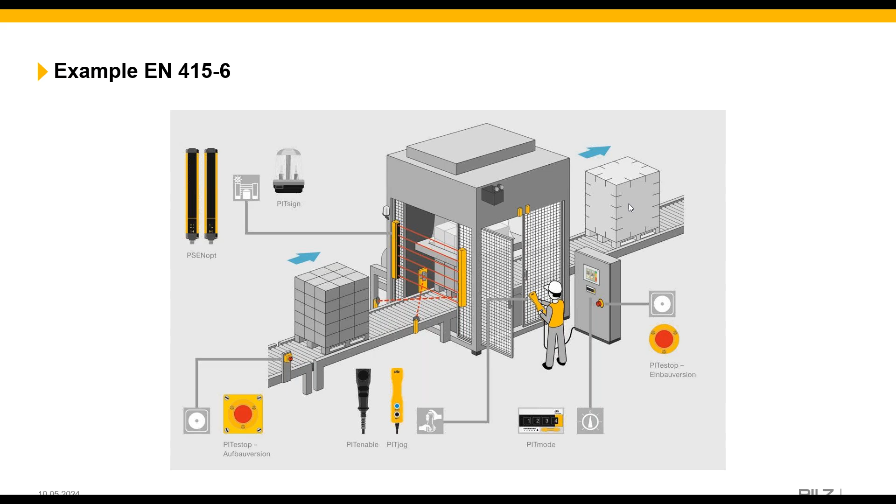So, examples of operating modes. You can see we have our PIT reader and key, and then we've got our push button to change the various modes here. It doesn't have to be a push button. You could do it via an HMI, or you could do it via push buttons as well.

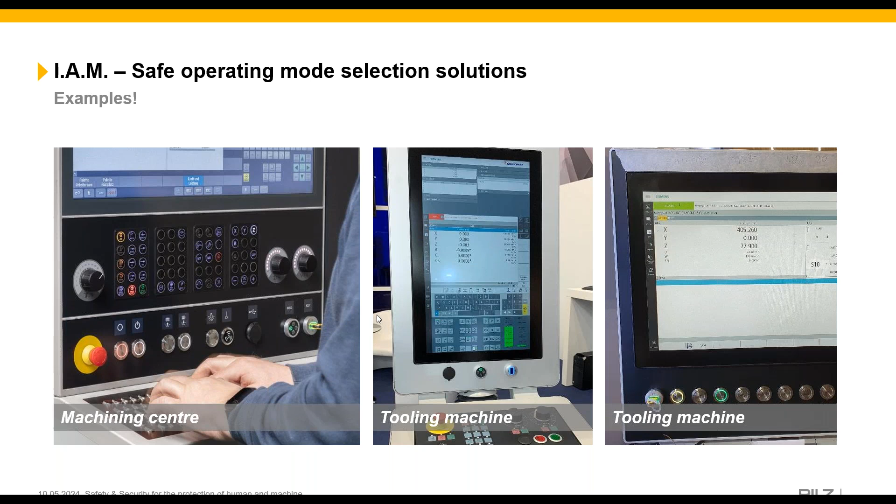So here's our key. We would press the corresponding button depending on the mode that we wanted to choose. And if our key had the correct permissions and authentication for that level, it would allow that mode to be changed. If it didn't, it would go red and prevent that access.

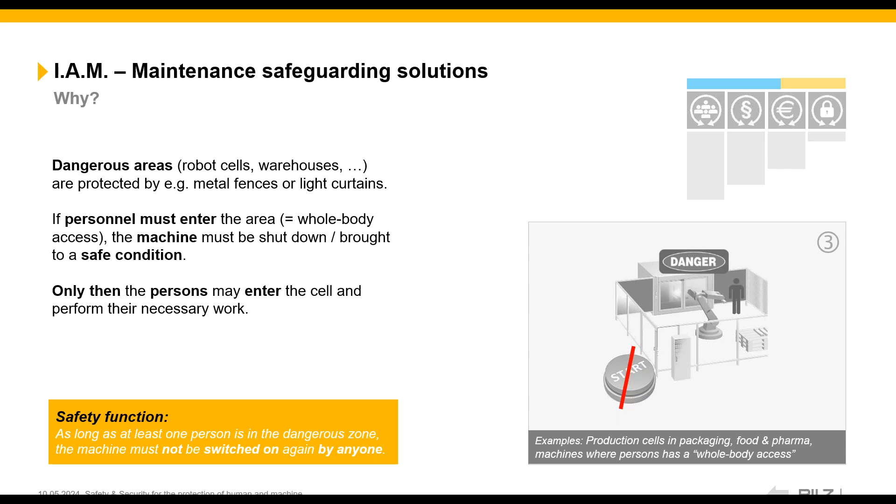And then we also have maintenance systems. This is what we call key in pocket. This is where you've got dangerous areas such as robot cells, warehouses with automated storage and retrieval systems. So if personnel enter an area, what we call whole body access, the machine must be shut down and brought to a safe condition. Only then can the person enter the cell and perform their task. But also you don't want that machine restarting whilst they're carrying out that task.

So in this instance, an operator would authenticate themselves, signing in. If they've got the right permissions, it would allow them to request the machine to come to a standstill. When that machine has come to a safe stop, it would then allow the interlock to be energized. They can gain access. They would take the key in with them, but that key would be logged in the system, so it knows that they're inside. So if somebody was to come along and close that door and try to restart it, it would know that an operator was in there and hadn't come out. Then when that person leaves, they would sign out, and it would allow them to restart the machine.

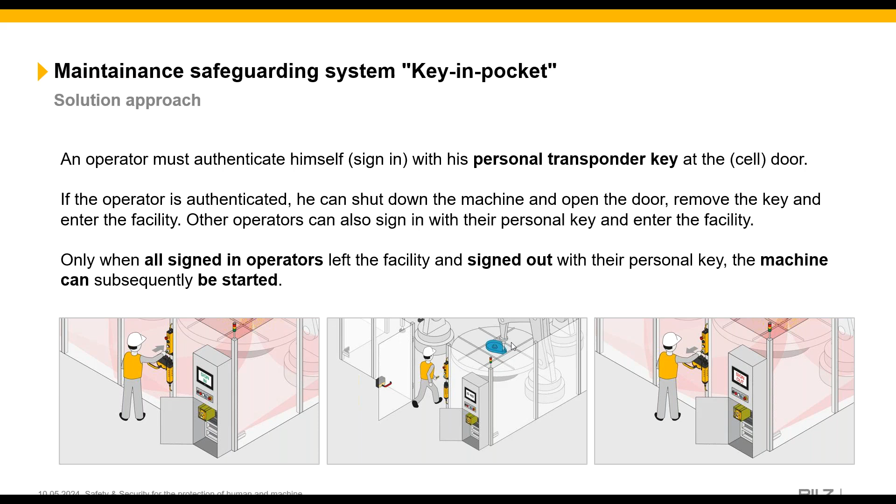And so we can do this with quite complex systems, really. We have our reader, we'd have what we call our PNOZmulti, or we could use a PSS 4000 or universal. We can have our PITreader for signing in and out, or we can use an HMI to display the number of people that are in there. And then we can use an LED lamp to have a visual indication as well.

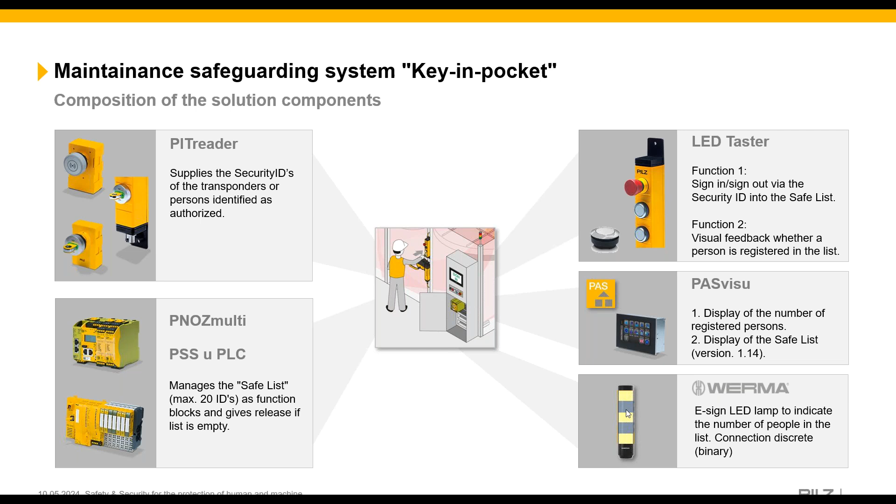In this instance, if you've got various gates around a machine, you don't always have to come in and out of the same gate. You could go in through one gate, or it could be a light curtain, for instance, go through your automated storage and retrieval system, walk 100 meters, and leave through another gate. But what you would do is log yourself in, register yourself when you enter, and in this case, the machine is green because it's running. It's now come to a stop and one person has entered. But if a second person comes in, they would just register their key, and so on. If a third came in, they'd register their key, etc.

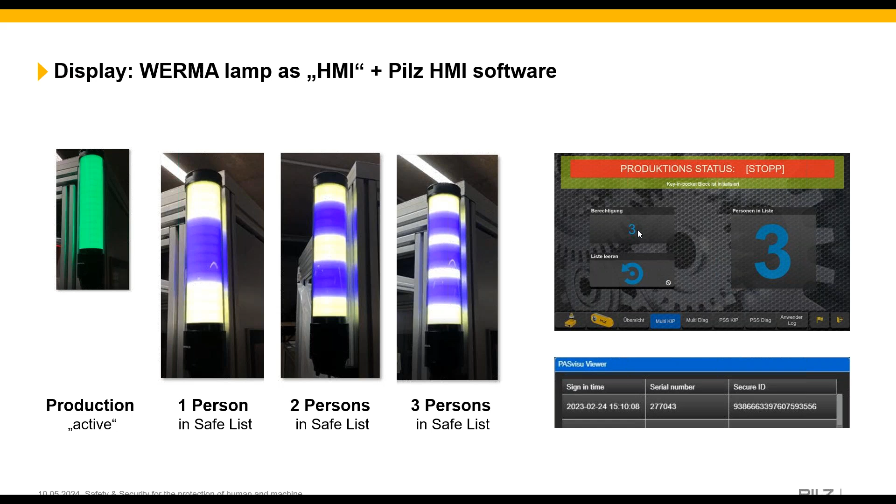And this can all be recorded and documented on the HMI and within the system. We could then see that myself and others were in the machine, or it may be that you walk past and identify somebody that hasn't registered, so therefore you can do retraining, for instance. Or if you're trying to see who is on that machine, perhaps to restart, you can identify who's logged in. And that's where we have this kind of system here, so you could enter through one door but exit through another.